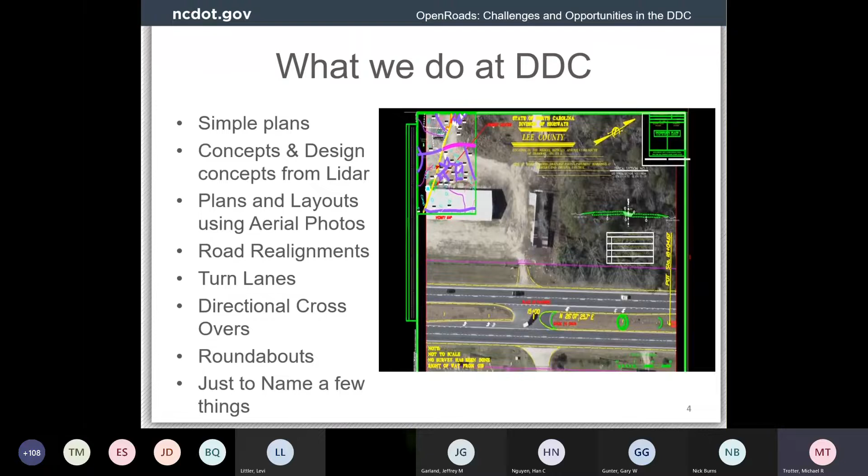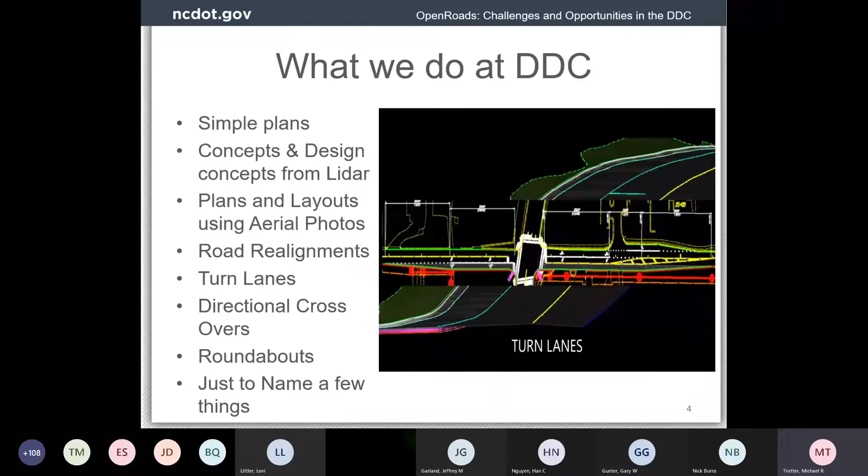One of the nice things about my job is the variety of projects we do. This includes one-page plans, concepts of all sorts, design concepts from LiDAR, plans and layouts using aerial photography, and the list goes on with road realignments, turn lanes, directional crossovers, roundabouts, emergency pipe replacements, building site plans, and riprap buttresses. So pretty much if nobody else is around to do it, they come to us.

The work from TIP projects is planned for several years. Unlike most TIP projects, we have special requests, and that's what generates most of our work. The range of the projects is just one of the challenges that DDC has with OpenRoads.

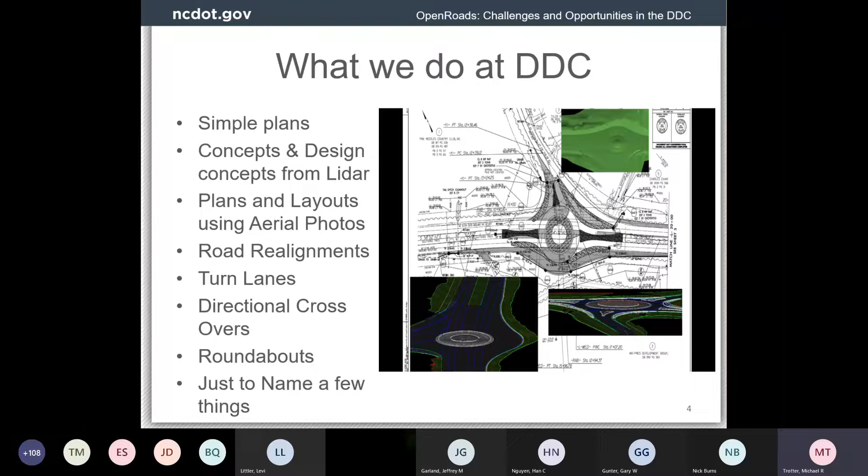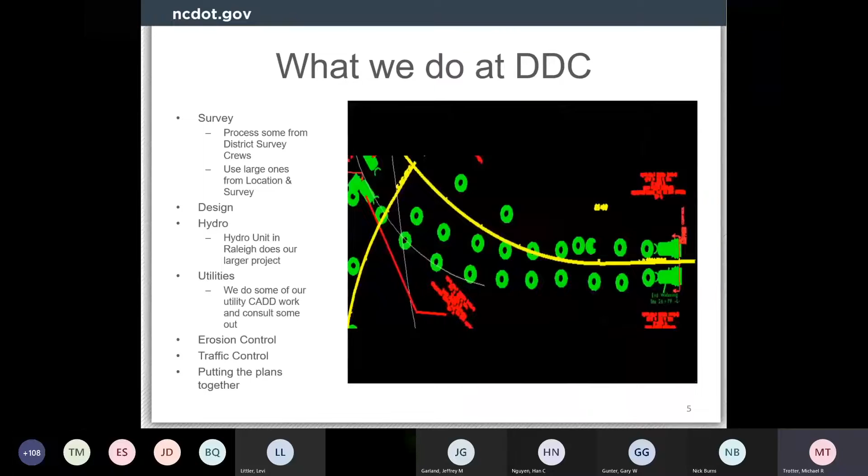We also do the surveys. We can get it from location, or we process it ourselves, either from the small district survey offices, or sometimes location will send me what they have if we're in a rush. We do the design of the projects, the corridor modeling and cross sections. With hydro, we do small pipe, but we're glad to have our hydro unit do our larger projects. Utilities, we've done several water line relocations, sewer relocations, and helped with power pole plans. The large projects we usually contract out. We do erosion control plans for the project, pavement marking plans, traffic control plans sometimes, and we put it all together and print it out.

This is a long list of things we are going to have to learn how to do on OpenRoads. Some of it, like hydro, we'll let the experts do for us, but we need to know how they do it to make all the plans work in the end, I think.

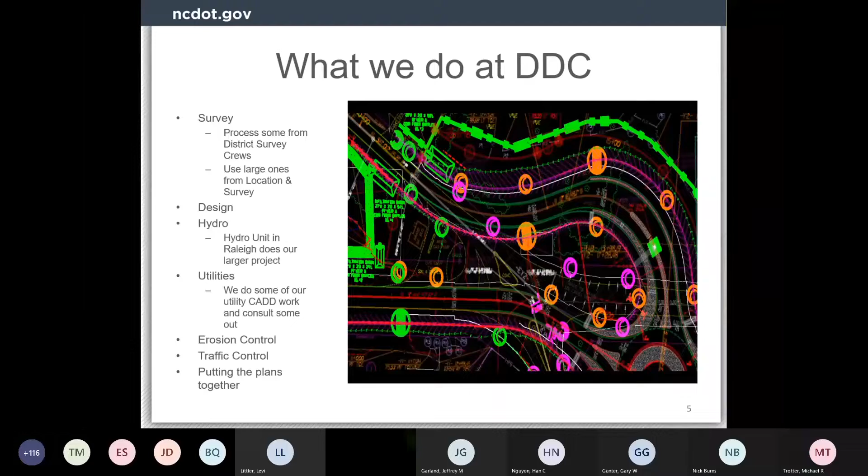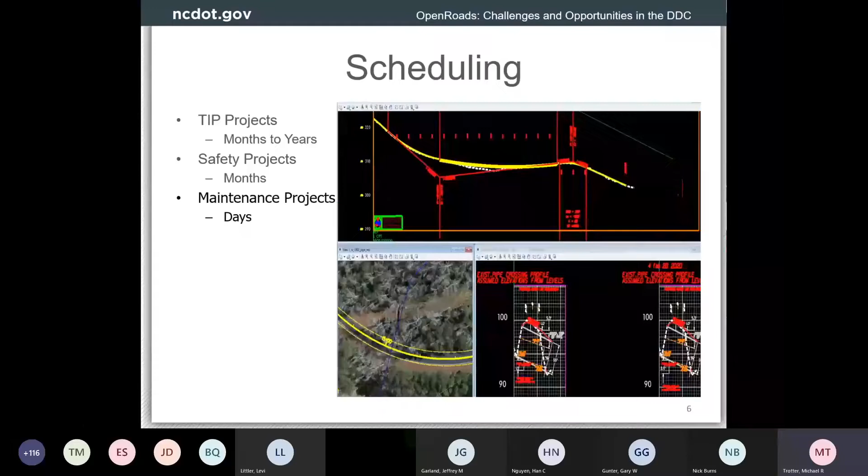With this list, we have a varied timetable as well. Most of our projects, luckily, have what you'd call a normal, unrushed schedule. Others, like safety projects where there's limited scope, funds, and right-of-way needs, expect us to have plans fairly quick. Projects being done by the maintenance yards usually give me a week or two to come up with something, but there are times they need the information in days.

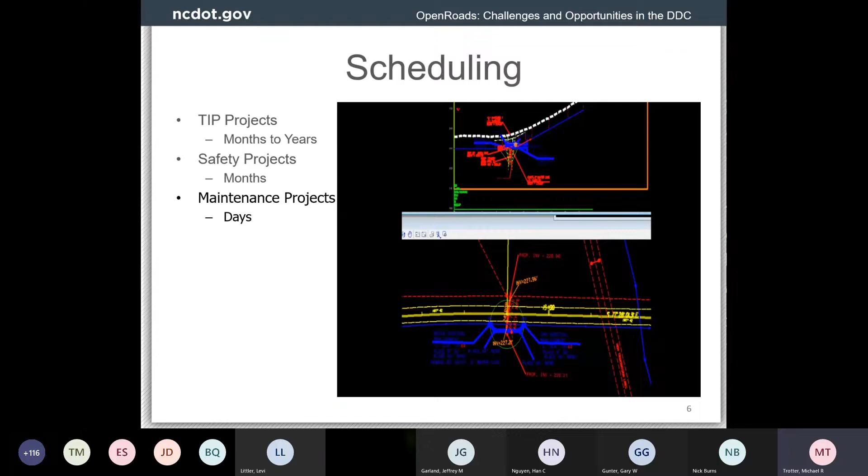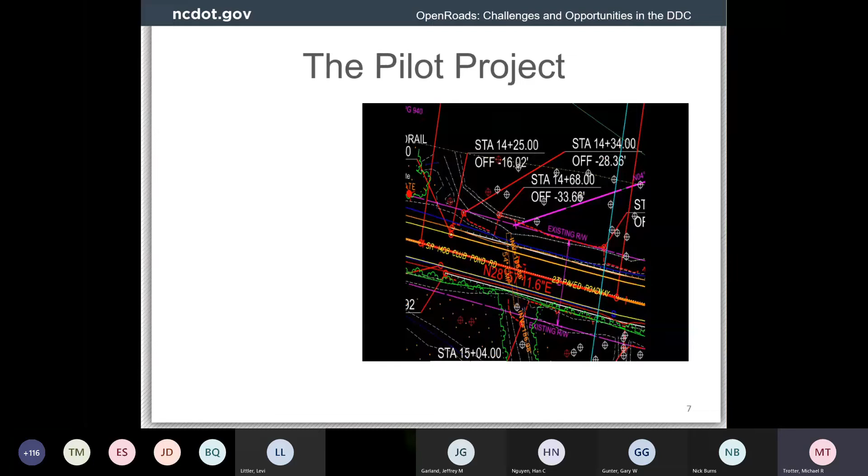That's a good segue into our pilot project. We picked a simple project for our first OpenRoads and ProjectWise project: straightforward guardrail project, one alignment, widen the shoulder, put on guardrail, no rush. I'd almost say it was easy.

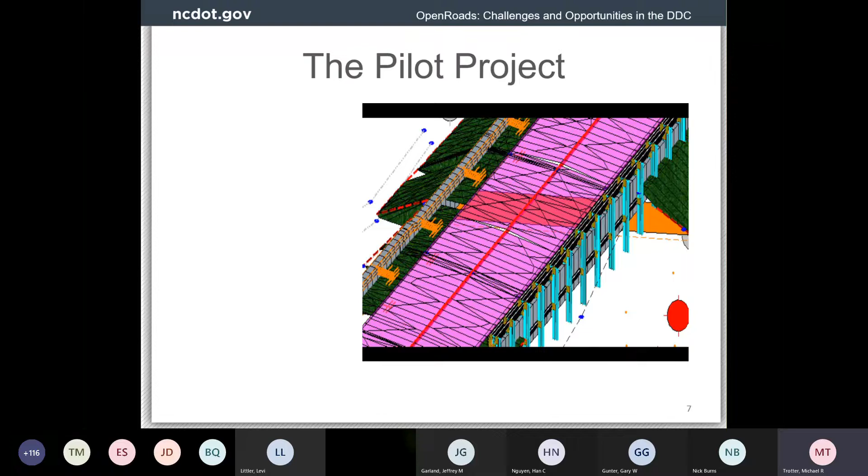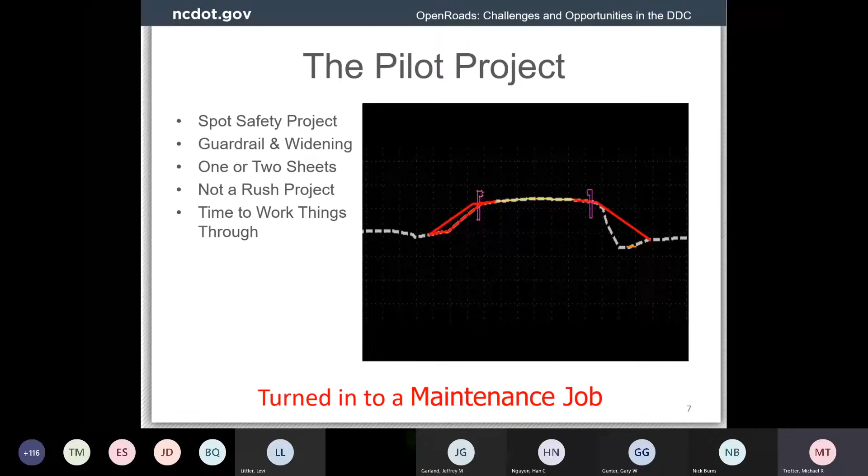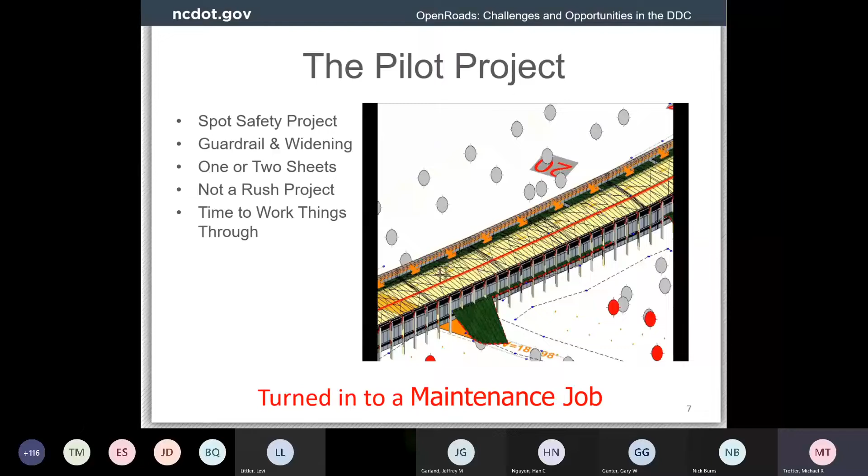Then we got the survey, and I was informed that it became a maintenance project. They were going to go out there and do it, so my unrushed schedule turned into a couple of weeks to get the information they needed to lay it out. Another reason we picked this project was that if I had to, I could do it in SS2, which is what I finally had to do. There wasn't enough time for me to work through everything, but I did learn from the project. One thing was the guardrail.

You can see in the 3D view it's just not right. I had taken an old guardrail template used before and changed the feature definitions to OpenRoads. Well, it didn't work, and I wasn't too surprised.

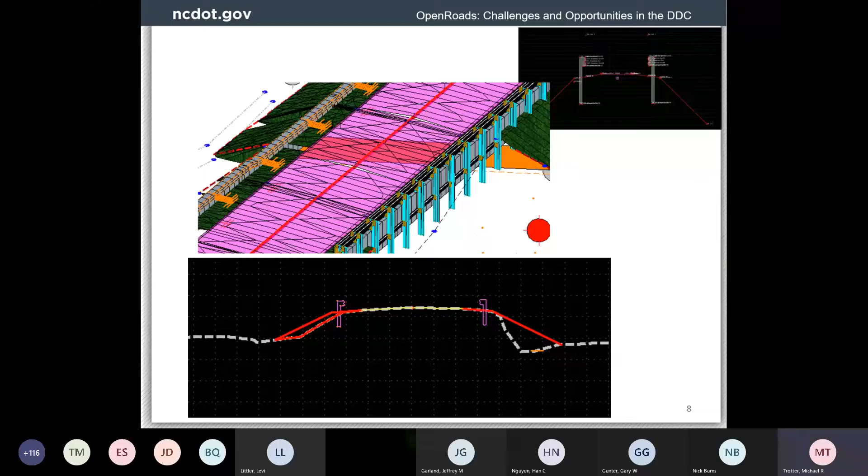All right, let's see. Can you see my MicroStation file? Yeah, we can see it. Thank you.

This is the pilot project I was working on. One thing about the guardrail was I was able to come back through and do a bit of work and make it look a little better, but I still didn't know about new ways of doing it. That's what I was going to try to show you right now.

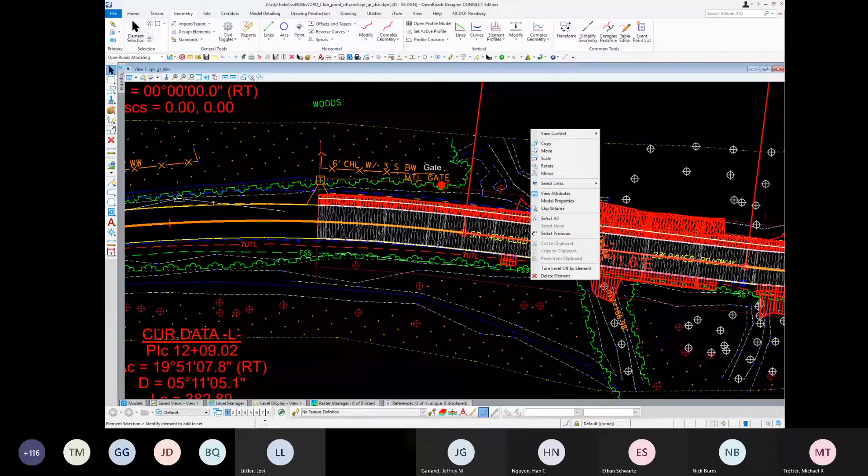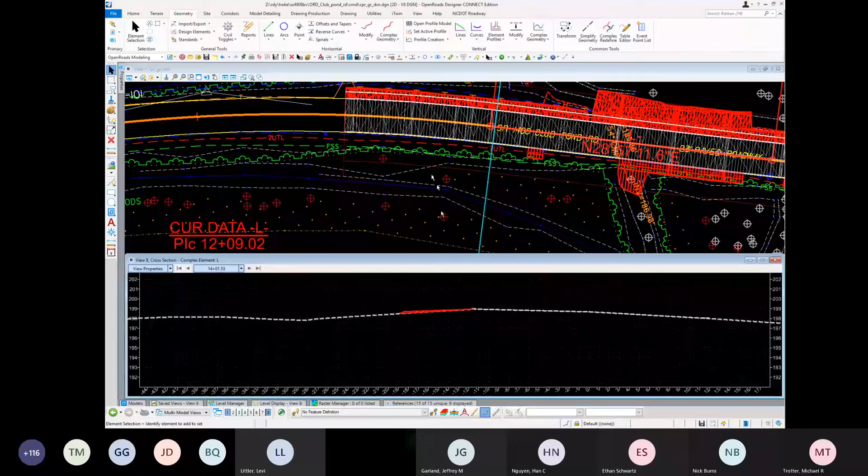I've gone in and researched, and found out that guardrail is now a function that can be done with feature definitions. Also, I found out it doesn't quite show up right every time.

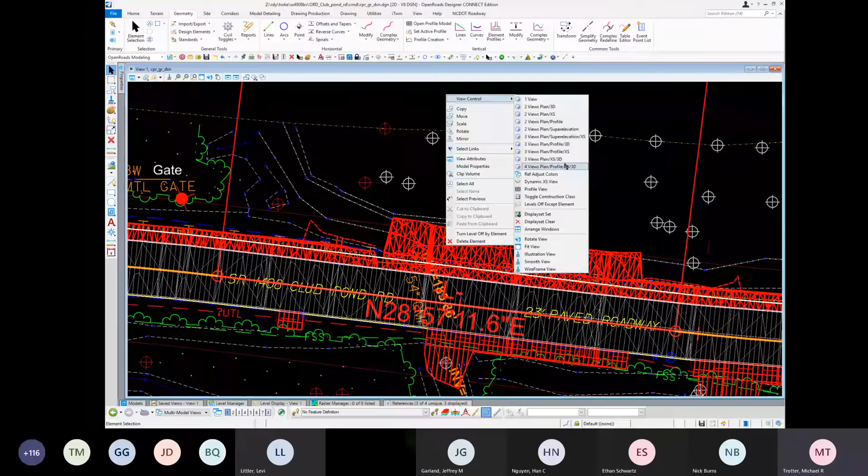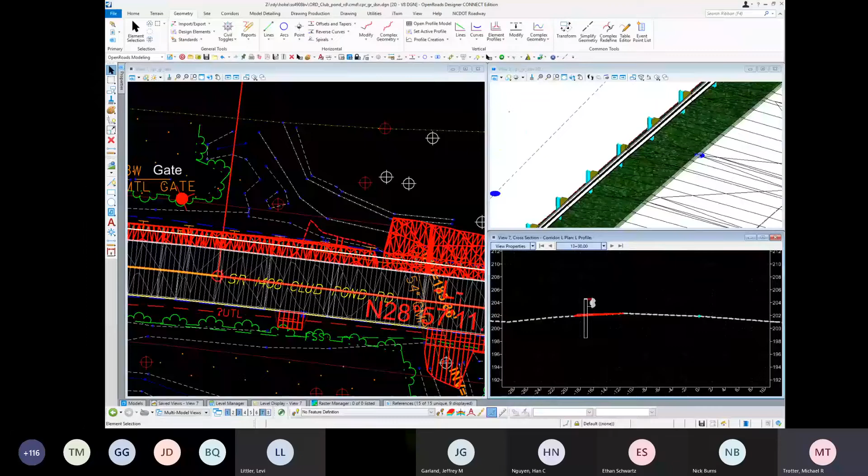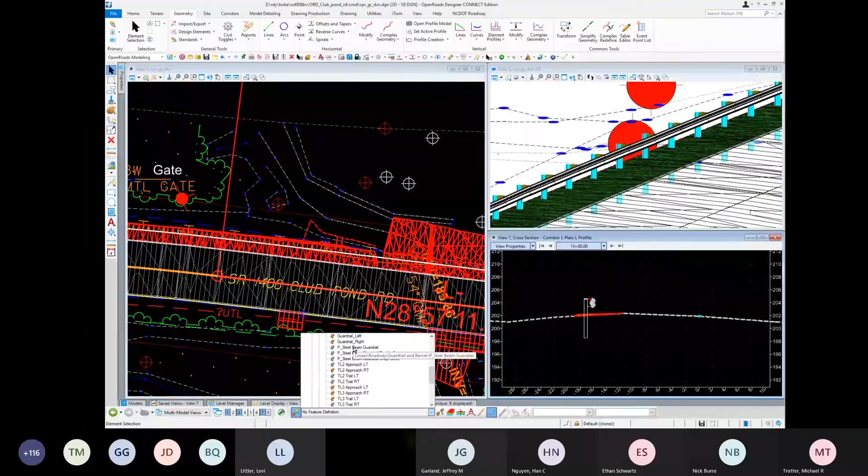There you go, I've already got one on here. You can see it nicely in the 3D view there. It's done like any other feature definition put on an element, using the geometry tools and the feature definition.

I can just do an offset taper, select the alignment I want, and note that you have several lines here—make sure you pick the alignment. I found when I've missed that, it's not gone well. I put it over there where I want. Aha.

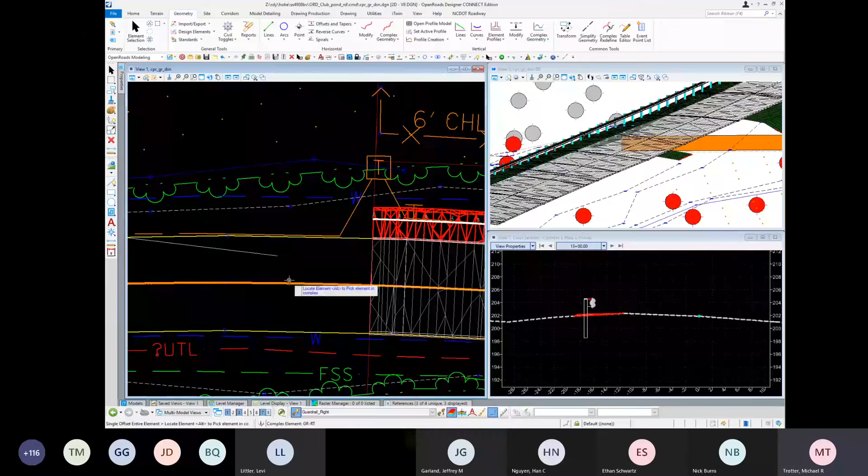I will admit, I forgot to turn that on—that right there is automatically create in 3D. So with that on, now it shows up in the 3D. It won't show up in the cross section until you refresh it.

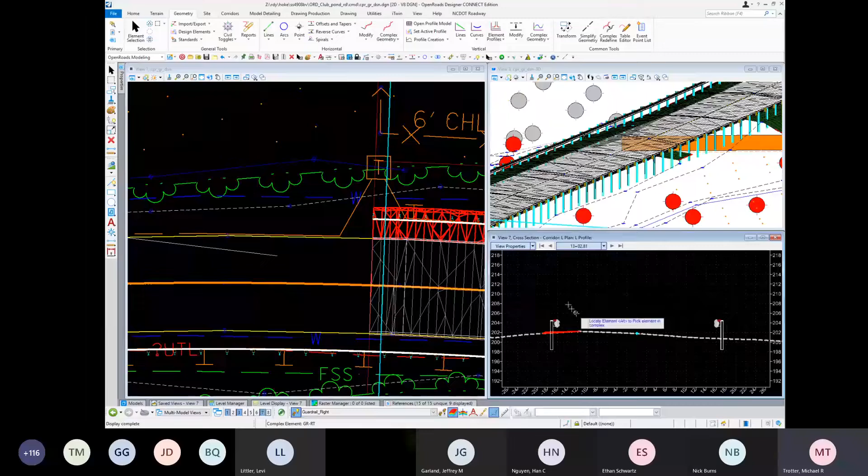And like everything created with geometry and feature definition, it is dependent upon what you created it from. So if you move the alignment, it will move that. I'm going to demonstrate that. Bill the other day made good points about how the boxes and everything are dependent.

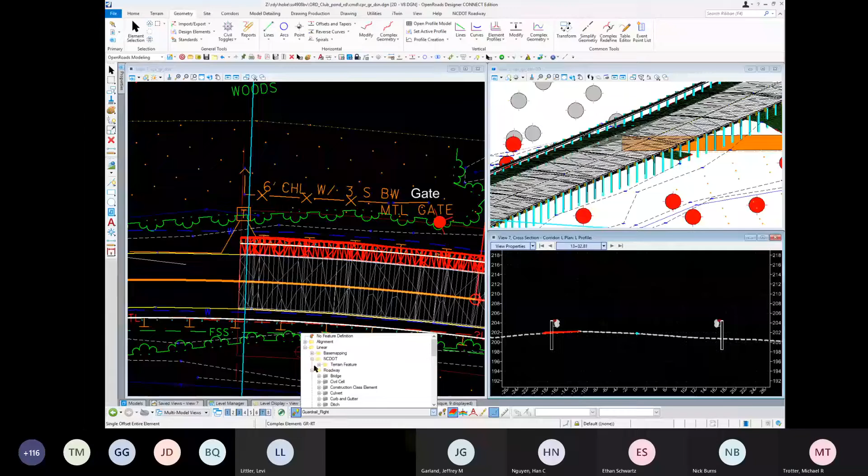One thing I've learned that we need to keep in mind is that dependencies come in everything with intelligence on it. So I'm going to do a little demonstration.

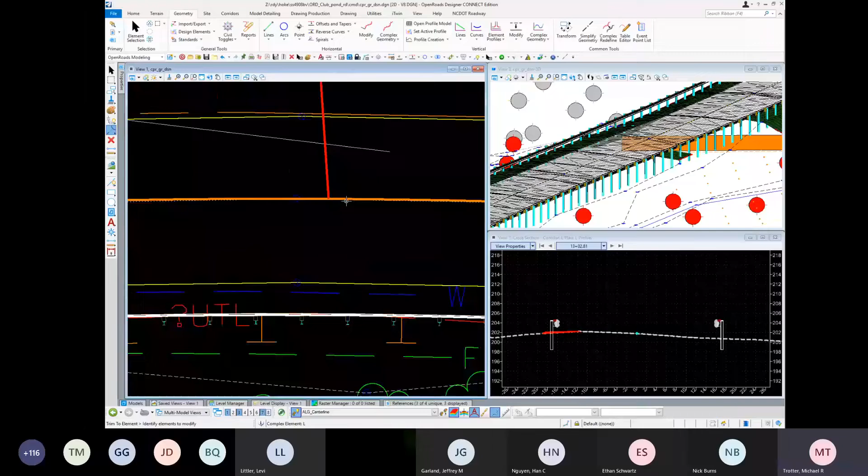I make that line dependent to the alignment. Again, I want the alignment and not the crown line. And the dependencies are even more complicated than that, since you use the snaps, like I want midpoint. And now there's a rule to that.

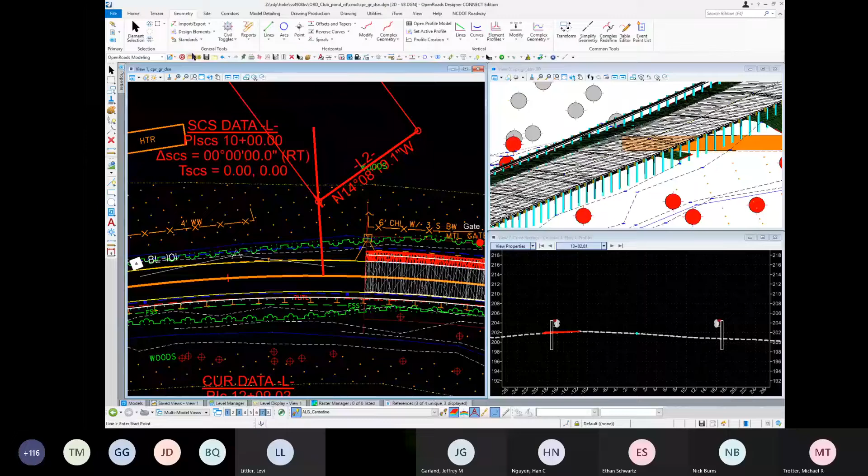I'll show a little demonstration. It's going to go in there, and as soon as it finishes opening...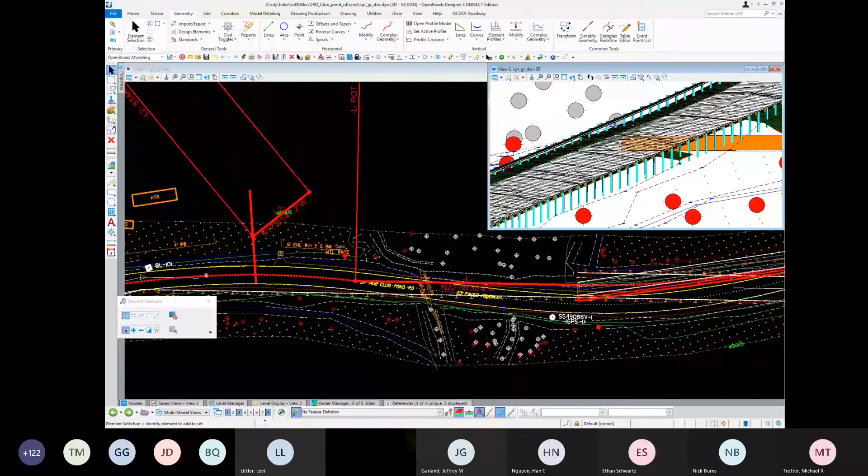Well, I moved it. Obviously it didn't like it. But you can see how the guardrail did move with it, and that's the thing to keep in mind. If you don't get it all put together right, like I didn't, you won't have results like you're expecting. And it didn't like me moving that the way I did.

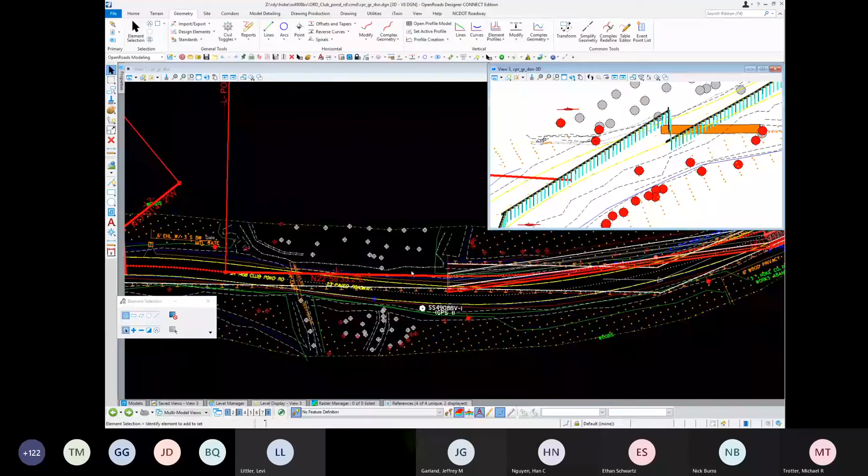I'll give you another little movie I made. Again, Bill was talking about how the boxes move with the alignment. I had a file that I put a lot of stuff on just to see how it all worked, and I'd gone in there and done sort of before and after.

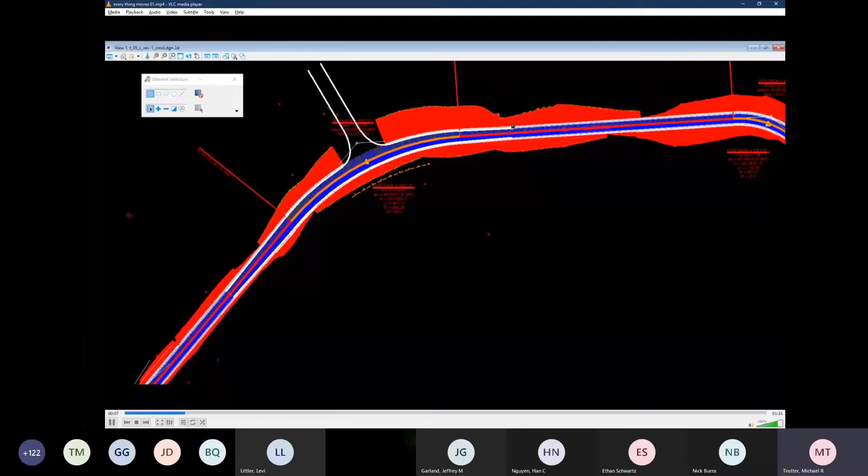Most of these boxes aren't put on there correctly. I was trying different things with it. But I'd gone in there, kind of before and after pictures. I moved the alignment over.

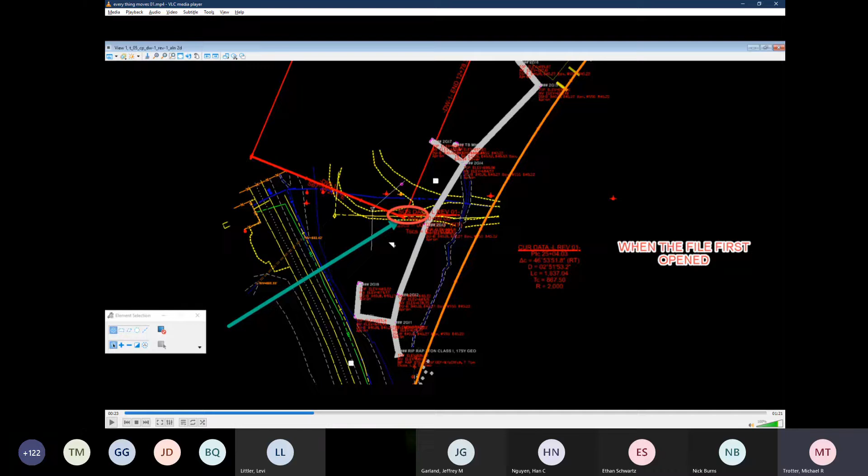This is when you first open the alignment. When you move the L alignment, everything that's referenced to it, you have to go back and go through the entire list of everything from that L alignment down. Like your own Y alignment, you have to go through there and let that update. So you see it moves to the Y line automatically after it updates.

You have my design file where I did some drawing in there. You see I did the edge of pavement, edge of travel way. All that didn't quite come in right where I've done that, so you see I didn't do things quite right.

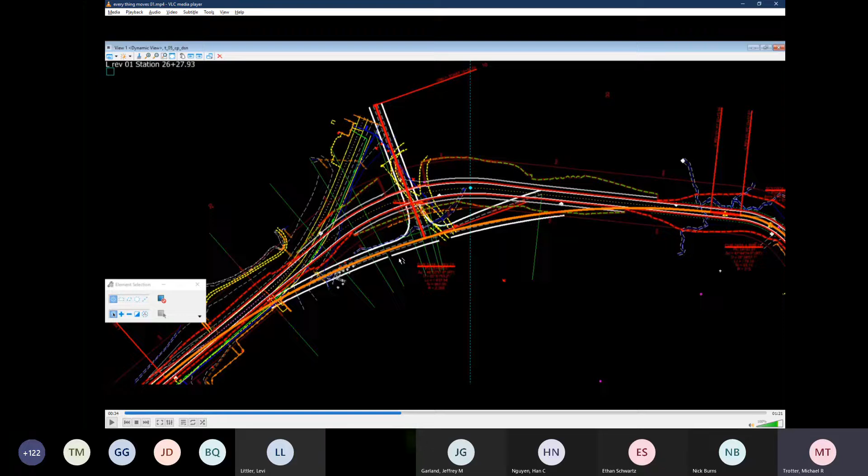It worked, and you can see when I first opened the corridor modeling file, everything is still where it was originally. Refresh the screen and it comes back to where it's supposed to. And as you can see, I still have a couple places where it didn't work. Either I didn't do those right.

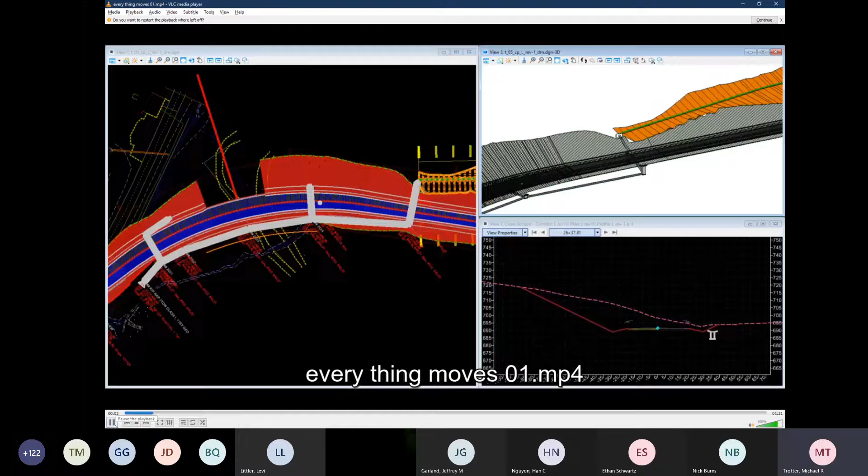Now with the hydro file, you can see some of the stuff moved, some didn't. Some of that was from a little bit farther back than I meant to. Some of that was from where I didn't put in correctly. Some of it was from where I've crashed this file so much, it's just a little unstable in places. But you can see how it moved.

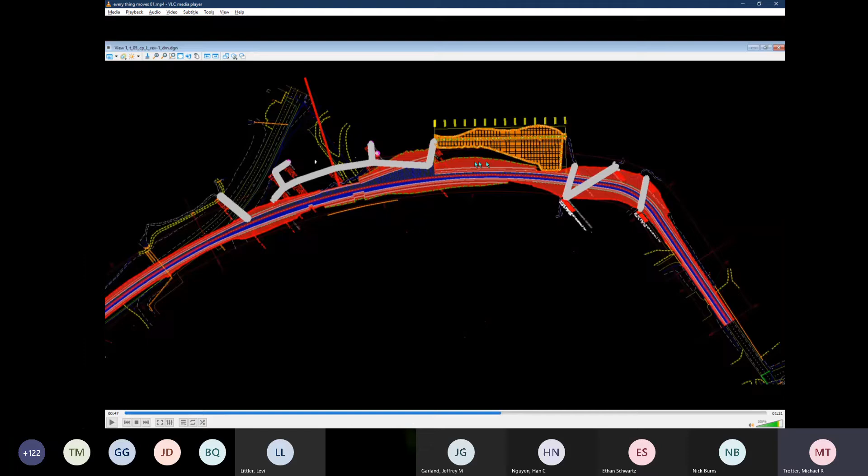Even there where I did a little hydro ditch and tied it to the cut lines in my corridor modeling, it moved dynamically with that.

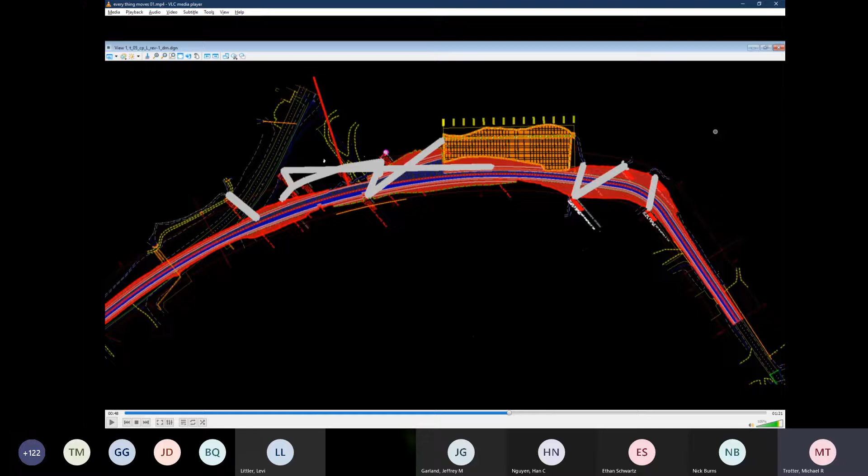And like I said, I found out that you have to go through your whole list of stuff. Anything tied to your L line, like a Y line, you have to open that, go through your corridor modeling and have that update. If you skip that and go straight to the hydro, I'm going to show this where it shows everything kind of moving along with the ditches and everything, and that little hydro ditch I was talking about.

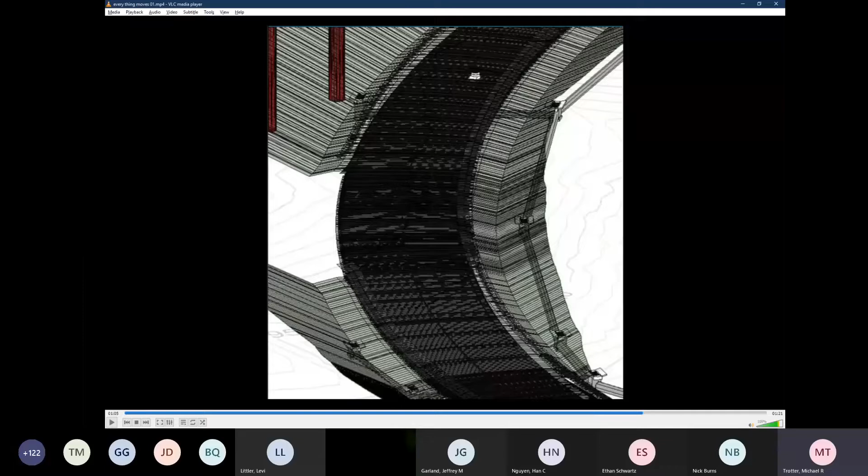What I had done when I was playing with all this, I had put together the ditches and everything, and I had moved my alignment a little bit. And when I moved my alignment, I forgot to go to my corridor modeling file and open that to let that update. So when I went to my hydro file first, everything kind of moved around weirdly.

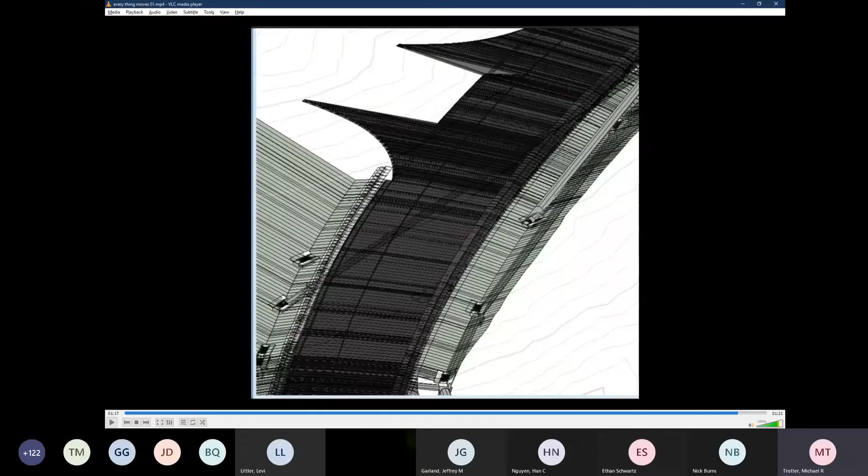You can see here, even though I didn't change my alignment very much, all my boxes pretty much lost their tie that I did have associated with the alignment. The other ones I don't think I did. Like I said, I tried a whole different bunch of stuff to see what would work or how it worked. Those that were tied to the alignment lost their alignment and rotated.

So that's where I learned you have to go through each file in order that you've done them.

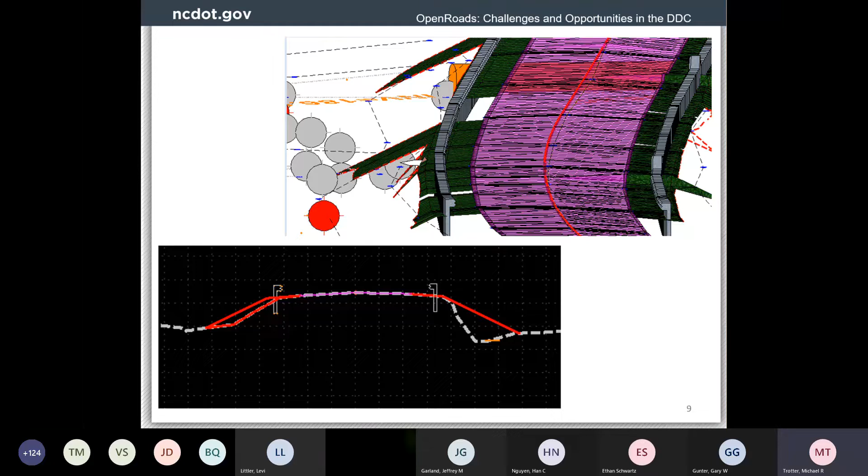And that kind of brings us to what we can do with OpenRoads and when we're going to it, I think. Right now, like we said before, we're just trying to make paper plans out of it, just like we're doing now. Yeah, stick with that idea.

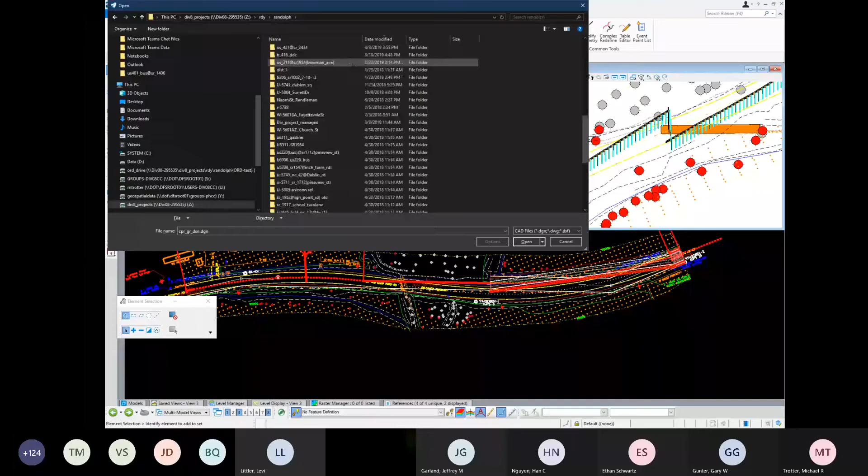I had made this file where I'd pretty much thrown everything on there, including the kitchen sink, trying to show my people in a little workshop what we're kind of working toward and how all this works together. I put some hydro on there, some erosion, some utilities that I could. Just a mishmash of everything, and not all of it worked correctly.

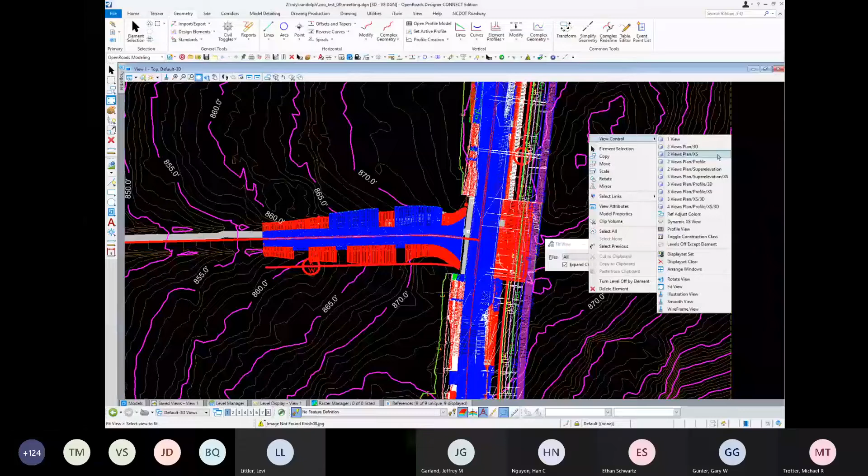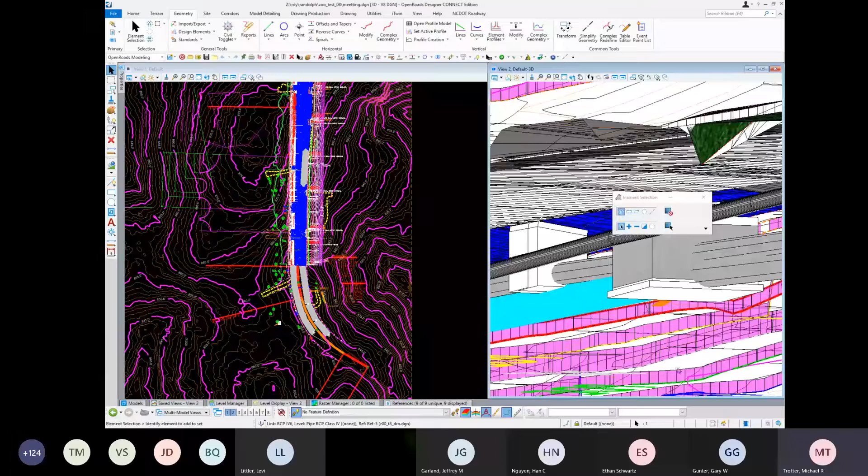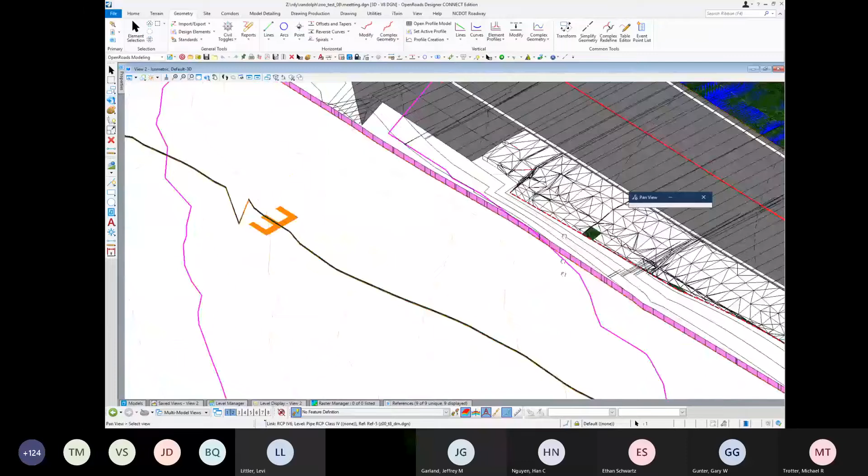But it did work good enough to give, I think, a decent picture of how all this looks when we finally get everything put together in a good way. I sort of faked a water line in here to show where it would go. You have the boxes here, and you have the pipes going through the boxes here. So not only can you see it in the cross sections, but you can see it in the 3D. Rotate it around and see what's crossing and what's going to each other.

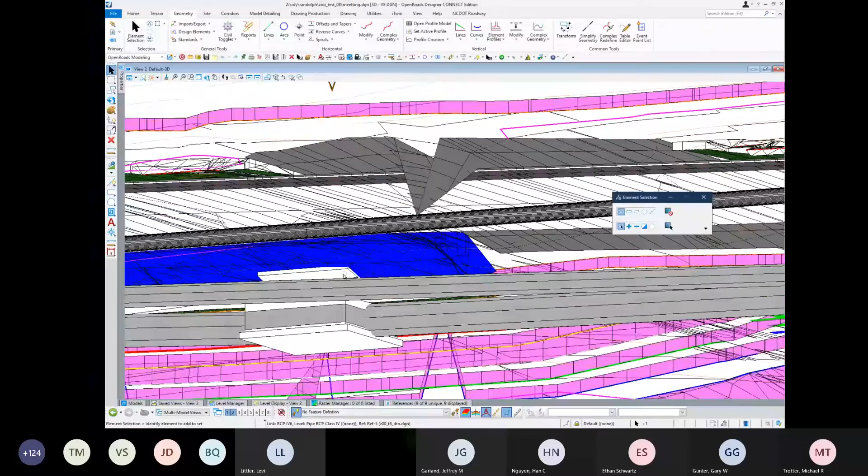There are also programs, I understand—I haven't tried them—that will do automatic conflict detection, like they were talking about in the other presentation. So that's what we're sort of working toward, to have everything on one plan, I believe. Although I think that's still a little way down.

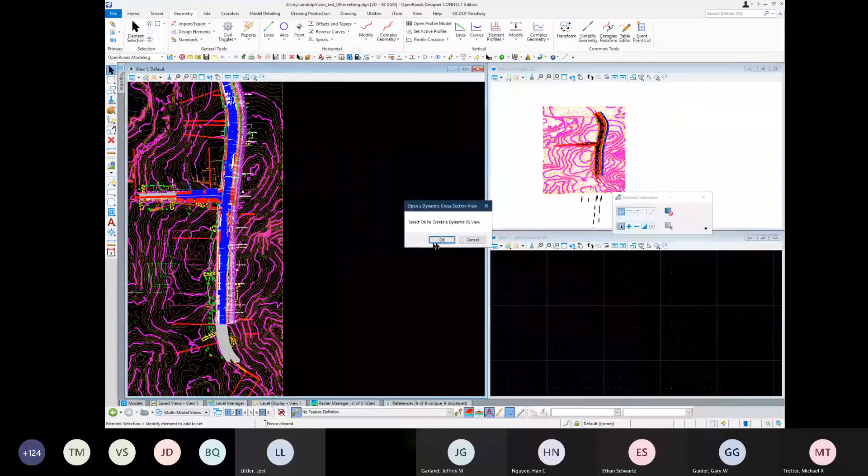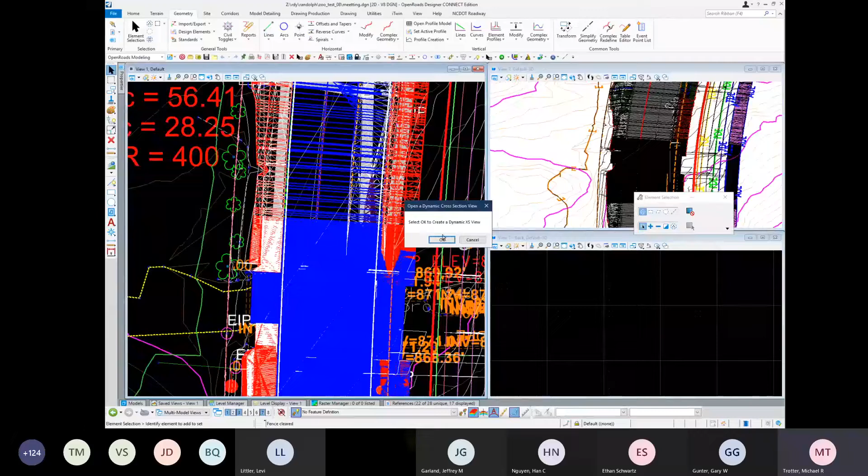That did not work. All right. That is one problem when you have something that's busy, is just clicking on the right thing. Sometimes it's helpful just to get out of the way.

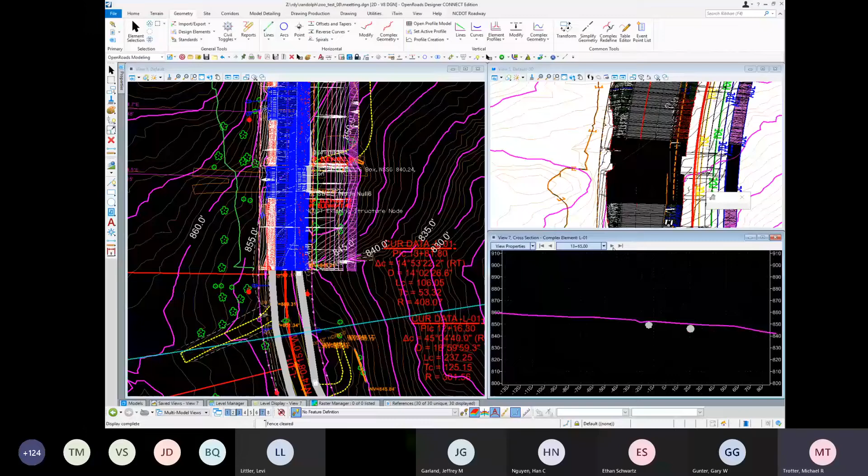And you see in the cross section, the pipe and the water line I had put in there shows up. And as you go through it, everything shows up without having to be put in the template. And that's the big thing. Some stuff like the road there, that's from the template, but the pipes, those come from the 3D.

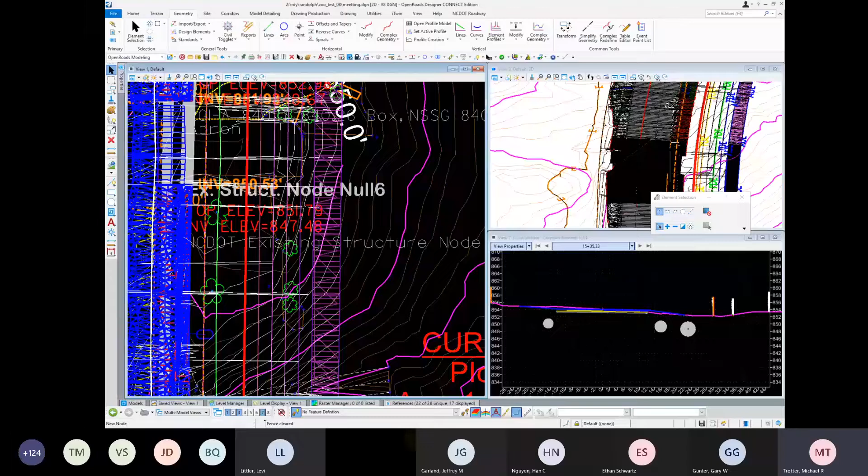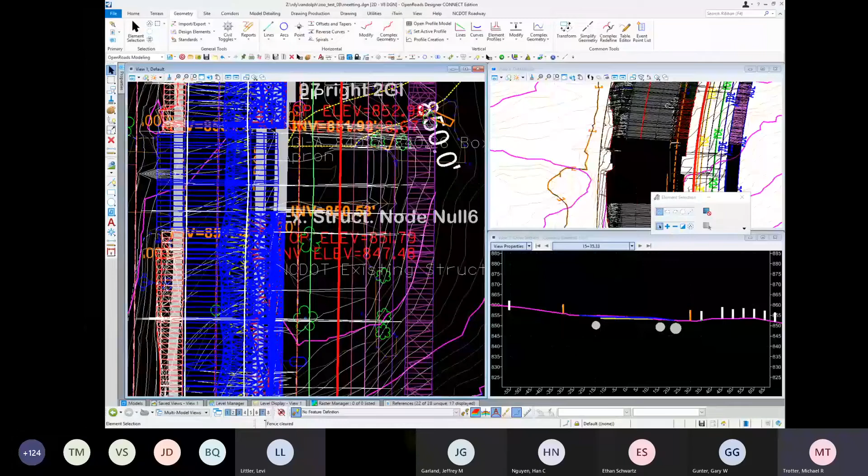Just like the guardrail did in the other example I gave you. And it makes everything easier. Makes it look nice on the cross section. I think it'll make it easier to build in the future.

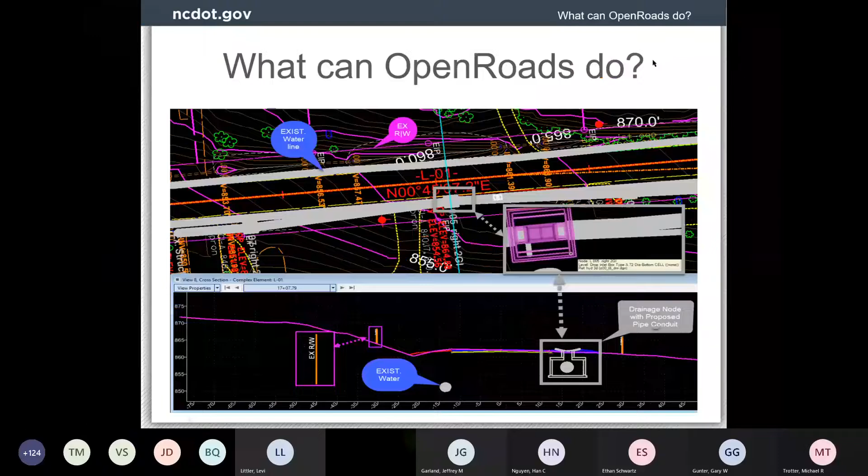And Jeff, that ends my presentation, I believe.

Michael, that was fantastic. I really appreciate you driving us through that. Thank you, I was a little tongue tied there a bit. Oh, you did fantastic. No, that's—I know, again, as we all are learning how to use the software and working through it, I certainly appreciate all the testing and work you put into it, because you're getting very adept at navigating through the screens and working through it, understanding some of the challenging areas as well as the ones that work pretty easily. So I really do appreciate it, Michael.

For the slide that Michael has up on the screen, just to reiterate, I know we're doing a lot of internal work at the DOT testing and training and piloting the software, but our hope is really to figure out the best way to have a multi-prong approach to working with our external partners and PEFs. The website listed at the top is where we're going to continue to post our current information. We're trying to add links to training opportunities for our PEFs, as well as guidance or manuals we develop, as well as time frames and anything you need to know around the ORD implementation initiative. So I'd suggest you visit that website frequently and reach out with questions.

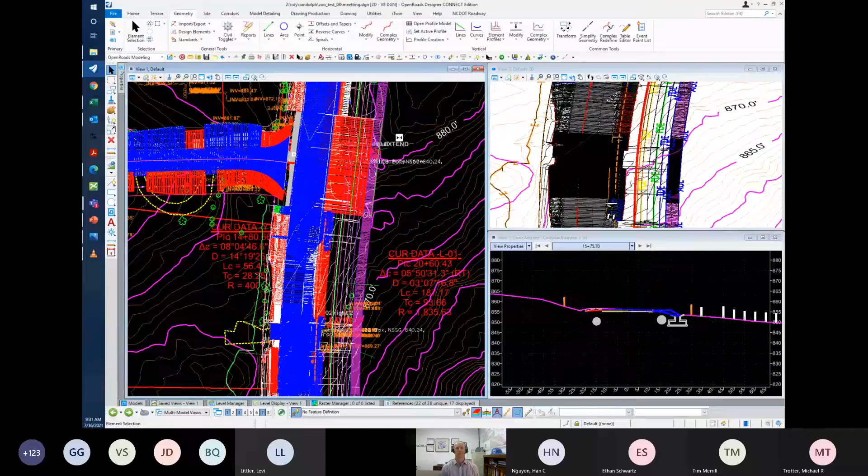When I talked to you about starting with the terrain file, what location gave me in the other one, that was actually a terrain file. And they didn't give me a TIN file for that. It was a terrain file, and it worked very well.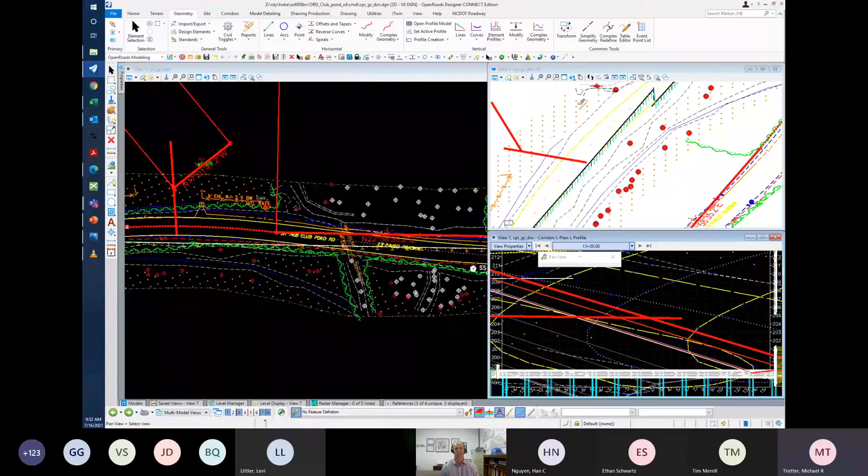And that's something else. Now, when you talk about dependencies, I'll take back something. That's one problem that may be a little bit harder for everyone to grasp going down the line - everything is dependent, starting with your terrain file all the way through your corridor. And that's going to be one thing that's going to have to be learned, that every file is really dependent upon itself. The small dependencies are easier to understand, but I think once you get into the larger dependencies,

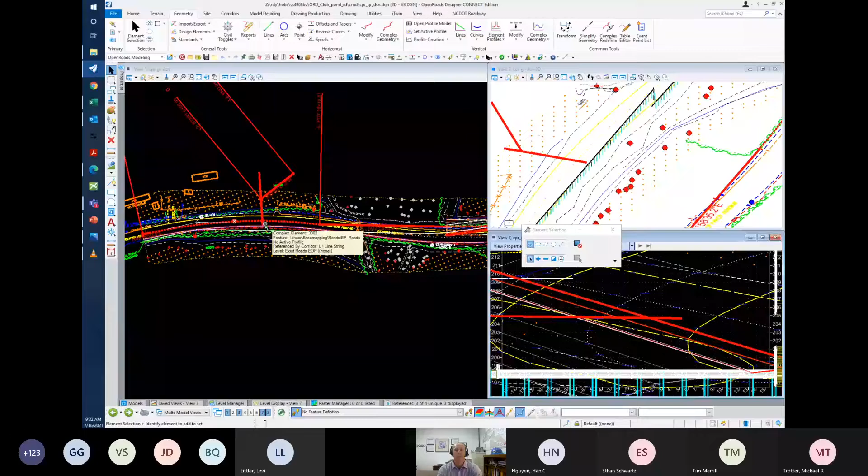the learning curve on that may be a little bit longer, or we might find more problems as we go along with it. Did I get long-winded on that one?

No, thank you. No, thank you. No, and Tim, great question. Thank you for bringing that up, Tim. And Michael, as always, very knowledgeable response.

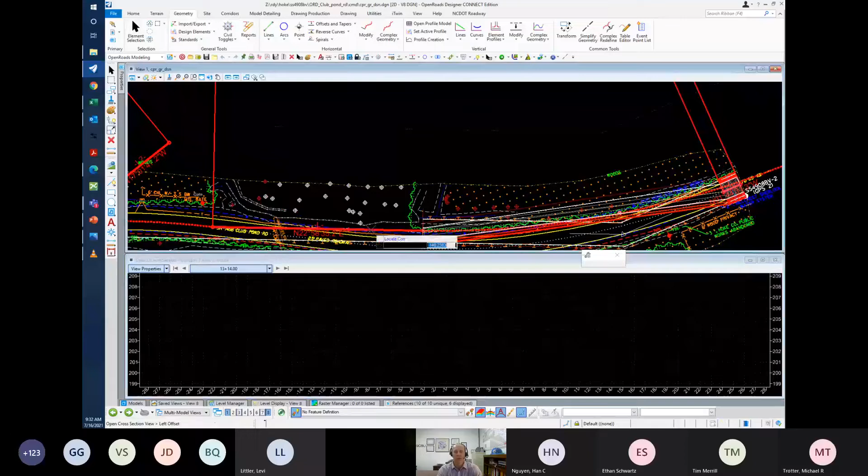And again, as far as that learning curve, Tim, I know we're all trying to figure that out as well. But I think to Michael's point, one of the biggest humps to get over is just to really get into the software. And as we continue to move from more of an academic theoretical approach into the practical logistics of people actually using it for production work, I think they'll find the answers pretty readily at that point. But that is the challenge.

Thank you for that, Michael. And Vaseem, I saw you put in the chat specifically you wrote, what is the approach for Division DDC on

working on projects and project-wise? And I know we're still developing that, and I know that divisions are using project-wise, getting out of the gate, but any thoughts on that, Michael, as far as the approach for the divisions using project-wise?

Well, we've talked about before that with the dependencies the way they are, we pretty much have to use project-wise, and we're looking to that. I've tested some stuff on project-wise, and I'm looking forward to the managed workspace to see how that works, because I think that'll make things a lot easier than when I tried to work with this project on project-wise. Yeah, no, agreed.

And I'm trying to get the word out more because project-wise has sort of been the untalked about thing in the last couple of years, even though we've supposed to been using it. And that's going to be something that everyone has to get used to, that it is on project-wise and that we will be using it for about everything.

Yep, and with that said, I know there's some folks on from CAD services as well, and I know we're working very diligently from the CAD services side to get some training prepared and some opportunities for the divisions to learn more about project-wise, et cetera, and then out for the industry as well. So really appreciate that, Michael.

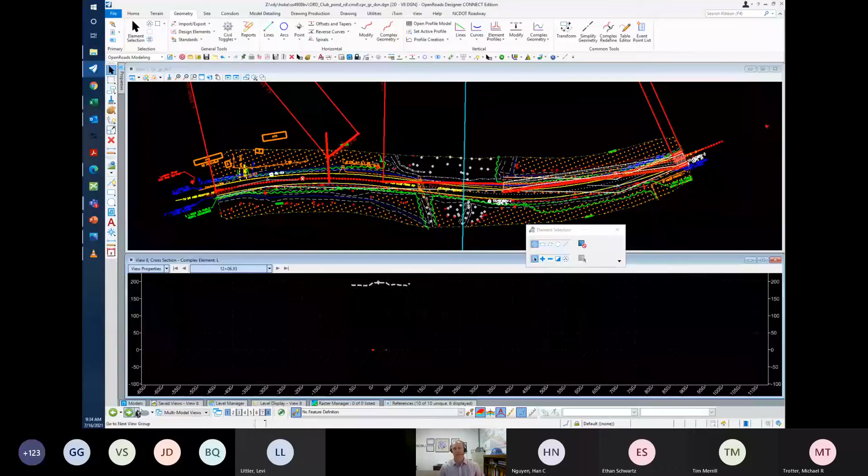Gary, I saw you put in the chat, and the question, Michael, is in your presentation, you talked about referencing to an alignment. How did you do that again? Just looking to kind of see that again from Gary's question.

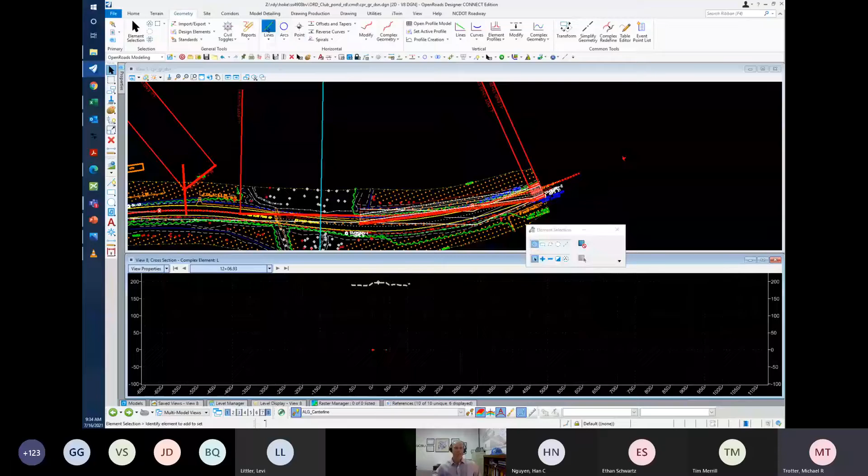Pretty much anything in OpenRoads that you have an alignment for. Let's draw one on here real fast. That automatically creates a rule in some way, and anything you reference from it, such as guardrail, like I had done before.

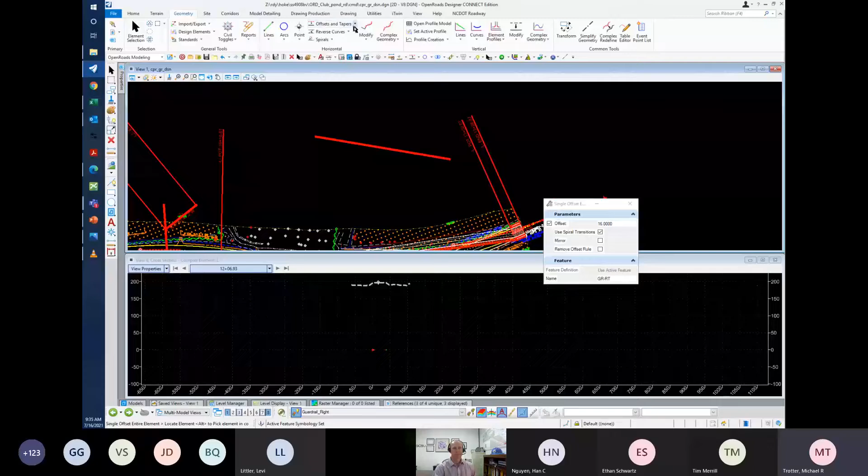Use the tools in the geometry for like a taper and offset. Say I just want to put it there. And because I made it from that smart element, it is now tied to that smart element. And anything that has intelligence in OpenRoads that you create from, or tie to in other ways, such as just even using some MicroStation tools, then everything becomes a dependence on that smart element.

Make sense? Gary, does that make sense? You can certainly come off mute if you want to talk to me more, Gary. Yeah, that makes sense, that's cool. Okay, yeah, anything with intelligence has a rule to it.

Anything you create from that element is pretty much tied to it by that rule. And anything that you, like I said, even just using the extend to, like that would be a Y line to an L line. That Y line would then be a rule to the L line, so that when you adjust your L line, all your Y lines would move if you had created it like that.

Are you talking about with the rule, or are you talking about when it's like activated or deactivated? I'm just going with the activated. I think there are ways you can deactivate this, but I don't really have messed with that. I just leave everything activated.

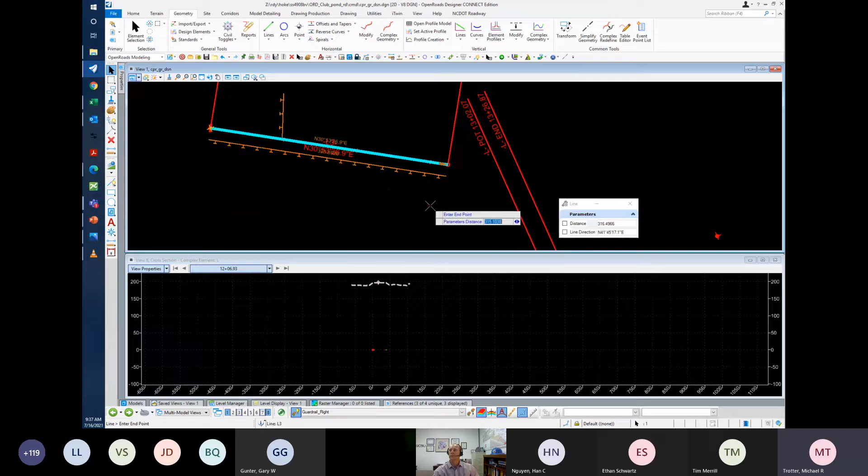I could see special reasons where you would take a rule away, like you might want to leave that guardrail there permanently, even though you need to adjust the alignment for some reason. But in most cases, I would want to leave all my rules so that everything worked the same every time I got into a file. Okay, I got you.

Thank you, you're welcome. And Michael, I assume the test project you showed, you were working on that test project while all the units were developing their workspaces. So just looking at other presentations this week, hydro and all, I wonder if the issues that you had are probably resolved with the workspaces that are already developed now, and maybe how hydro would approach that - those issues you had with the pipes and stuff not moving when you moved the alignment.

I guess that's more a question for Hydro than you probably. I'm just thinking how far have we moved along with these workspaces now that everybody's working on their workspaces, having them at a good point.

Well, I want to point out that most of the stuff I did with the hydro utilities, I skipped a lot of the hard work. I just was going for a nice picture. I was wanting to see more how it worked, because I might do some small projects, but like I said, Hydro is going to do our big projects for us.

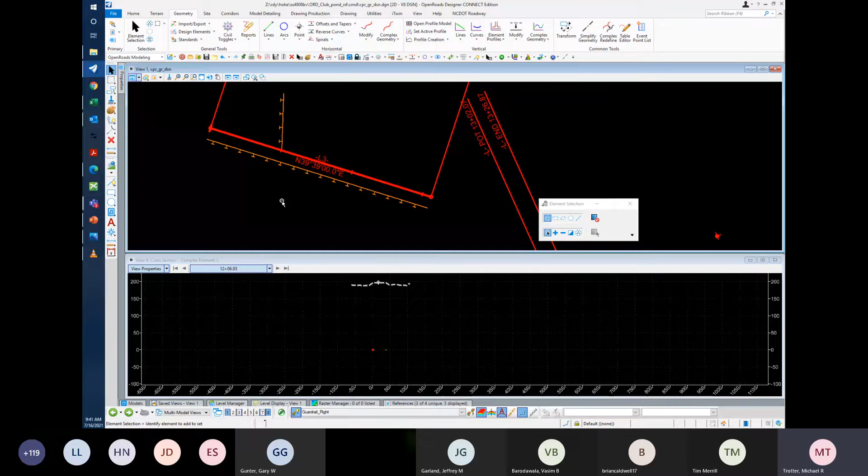That's one of my things on the list I want to go back and look at. But they look promising, and I have seen them work pretty good, like I said, early testing with the simple stuff. It's on my list of stuff I need to go back and look at.

Well, some of the useful places are driveways, which can get kind of time consuming, but there's other - well, just tying an L line to the Y line would be one of the places I think you use it the most. Right, T intersections and things of that nature. Yeah, there's some very good tools there.

They're fairly simple to use, not so simple to create or modify. Like you talk about all the rules - you have to be aware of all the rules when you actually modify a civil cell. It may not get the results you're intending to get, but that's just a learning curve.

Yeah, I'd go back to what Tim kind of was talking about earlier - some things are very easy. The alignment, the vertical profile, they're very intuitive. The civil cells are not quite so intuitive, but I think once you do it a couple of times, you understand how it works, and it increases your knowledge of how you do it very quickly.

They're just getting the practice of figuring out this works a little bit differently than what we've been doing. And that right there is a good thing - it's a hard part to understand, but once you understand it, you're doing really well, I think.

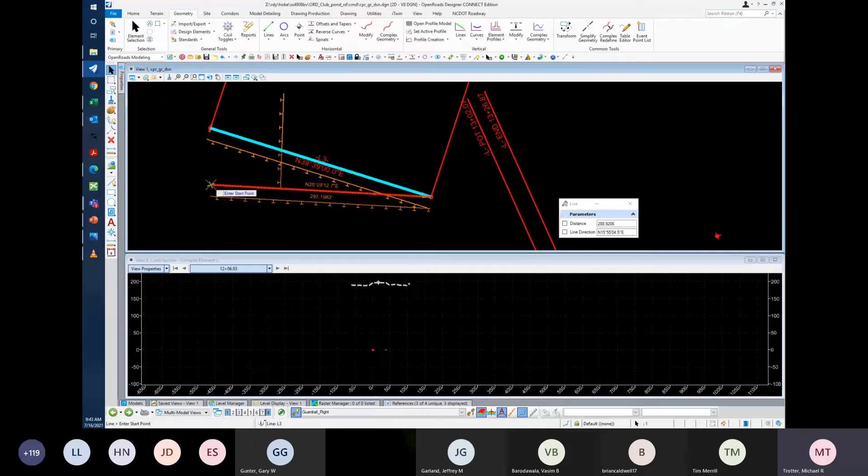One thing with element selection, you have more power with this than you had in SS2. That's how you move these elements if you're just trying to move them around, or moving them up or down. Once you get further into the software, you realize you won't want to do this right off the bat. You can turn some rules off on some elements so it won't do that, but you really got to know what you're doing.

Do some good training before you start down that path. This is to say, there are some options, but they're advanced options, and you might not get the results you want. My intention most times is to leave the rules on unless you have something special that you want taken out from the rules, so it's there as a static element more than a dynamic element.

And not just for you, but the people working behind you wonder why that didn't work when they did that. Exactly, or again, since we're all connected now, maybe that element should have moved, or maybe they wanted it moved or not.

Do you typically use the NCDOT all workspace or unit specific workspaces? I know ORD has a lot of icons now for each workspace, they're kind of all handled and separated. I know consultants use the all workspace, just because we tend to jump between disciplines in consulting, but I know NCDOT is not necessarily set up like that.

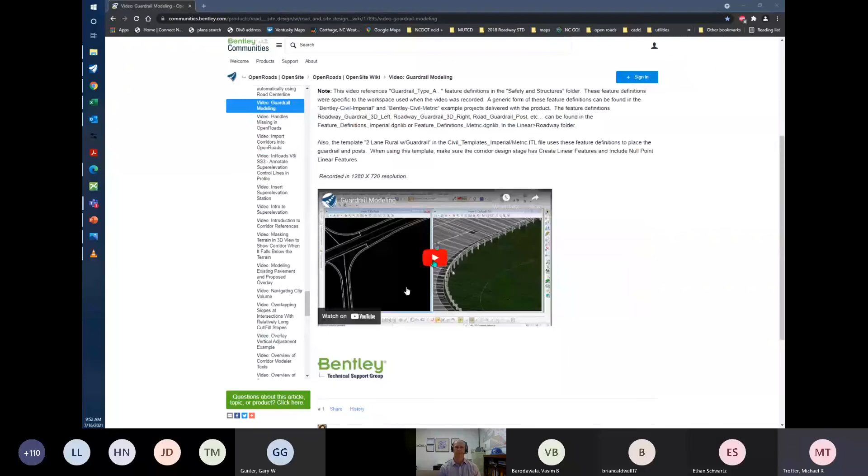I also meant to mention Bentley Communities, that's where I figured out about the guardrail stuff. Yep, also a great resource. Absolutely, a lot of stuff out there, searchable. It's been out for a while, so there's a lot of good material. Generally, if you search these three places, YouTube, Communities, or Bentley Learn, you'll generally find something to help you.